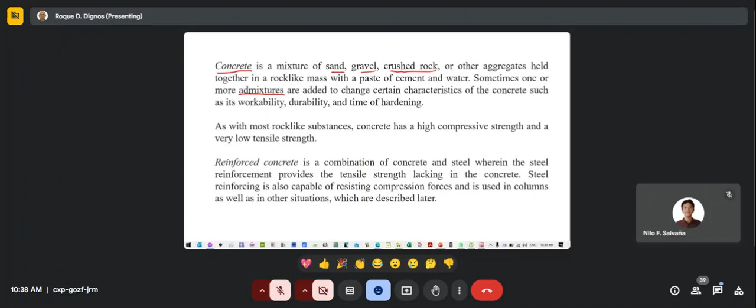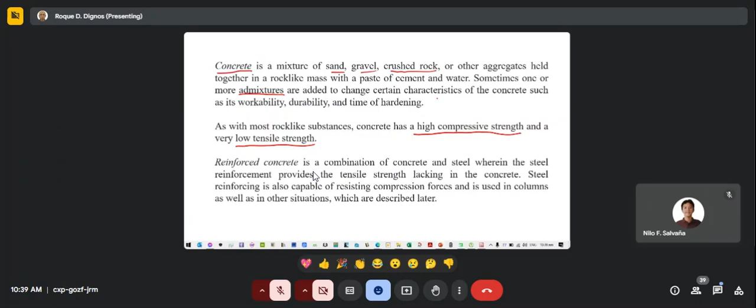Concrete has a high compressive strength and a very poor tensile strength. So if you want to use concrete as a structural material, it's not effective because concrete is high in compressive. We have to be reminded that our structural engineering is nothing but the moment, the shear, and the axial. Compression, okay. For shear, if you subject concrete to shear, it will crack, and concrete cannot resist the crack because it's very low in tensile strength.

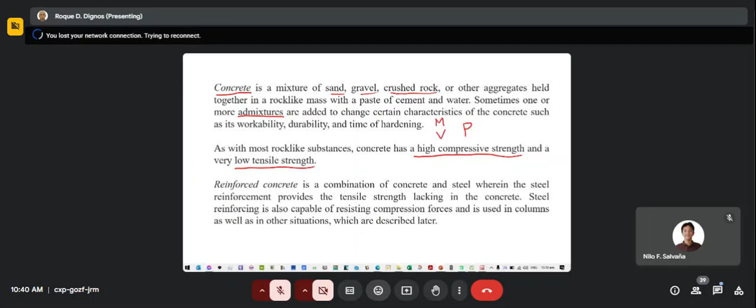And with the axial force, if the force is compression, no problem. But not all axial forces are compression. That is not usable. All the tensile forces or tensile stress will be carried by the steel, which is high in tension, and concrete is very high in compression. So therefore, it's doable. Reinforced concrete.

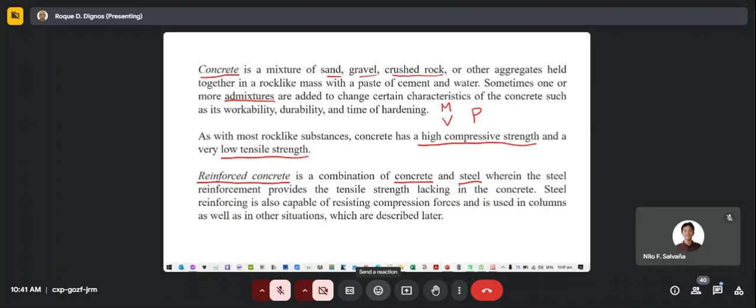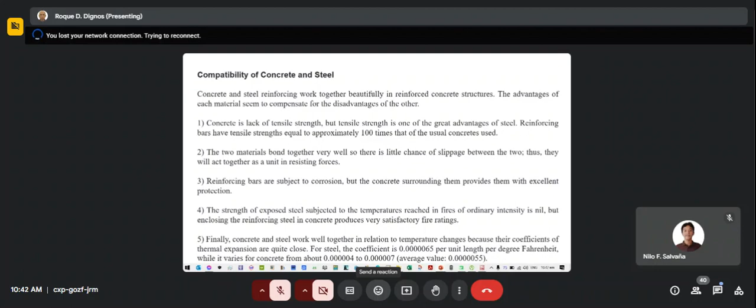Now, let's talk about compatibility of concrete and steel, and why reinforced concrete is the number one material in our structures today. Everywhere you go, there is always reinforced concrete. Big structures. But if you go to the substructure, it is almost always reinforced concrete, like your footings, your piles, anything in the substructure. One compensates for the disadvantage of the other. Tension is a disadvantage of concrete, but it is an advantage of steel. So they compensate each other.

No? So partners should complement each other's advantages and disadvantages. That's a joke, class. That's only in RC, in real life, not anymore. It's not true. It could be true, but not every time.

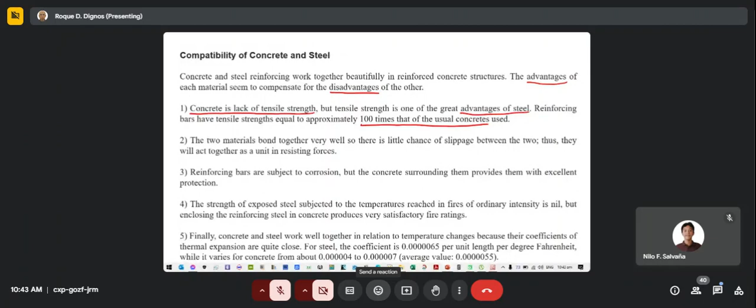100 times that of concrete. That's a big difference, right? The tensile strength of concrete, I think it's fr, the modulus of rupture, and steel is 100 times that if you want to get the tensile strength of steel. So they bond together very well. There is little chance of slippage between the two. Thus, they will act together as a unit.

So if you see reinforcement, maybe in your house when you construct something, you see that it has corrugations. It's not a plain bar. Because of the corrugations, when the concrete is poured, it bonds even more. So it will eliminate slippage because of the corrugated steel bars.

Number three, reinforcing bars are subject to corrosion. This is the disadvantage of steel. Steel is always subject to corrosion. But because your bar is embedded in concrete, the steel is protected from salt, especially near the sea where the air is salty and it corrodes easily from the wind. So reinforced concrete is a protection. That's why most of our port structures, the structural columns, piles, port slabs and pavement, are all concrete.

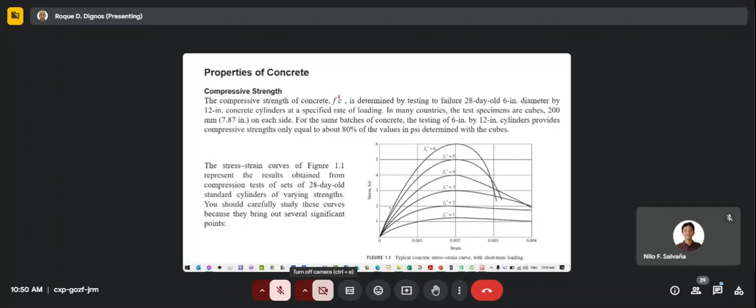We know there's a prime, f prime c, from our materials testing. We are in the Philippines and we use the American code. But have you noticed we are using SI, the International System of units? That's why it's very difficult for us instructors. That is very difficult. And the formulas are not the same.

So, you're familiar with the cylinder, but on the other side of the world, they use a cube. So if you go to the other side, the European, even in the Middle East, and all countries invaded by the British, like Malaysia, Singapore, I think Macau, those countries also use the cube. So it is a 200 mm cube. So again, it's a unit.

British and Europeans use the System International, SI, while Americans use the English system. It's difficult, right?

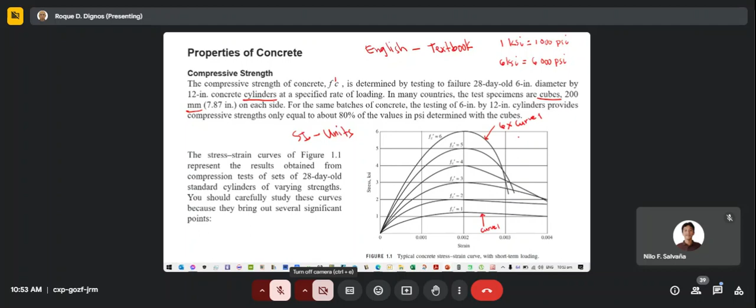Or the compressive strength f'c of 1 ksi, they all reach the peak at a strain of 0.002. So if you can see the diagram, more or less the peak is there. Not perfectly, but almost the same. And the rupture at 0.003.

What do you mean by that? Another term is crushing. They will crush at 0.003, more or less. Of course, it's not perfectly the same, but more or less they all fall there. So that's why don't be surprised in our subject when we go to the stress-strain diagram, our strain epsilon of the concrete at ultimate or crushing is fixed to 0.003. Every time, in all computations, the value of our strain of concrete is 0.003. There's a meaning to that, and this curve is the explanation.

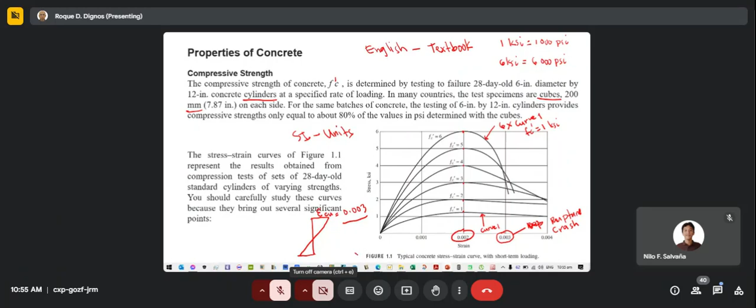And then the static modulus of elasticity, that is not Es, it's Ec, the modulus of elasticity of concrete. Es is for the steel, and we use this formula: 4700 square root of f'c. So that is for the static; in our subject it's more on the static modulus of elasticity. So we'll be using 4700 for our computation, unless the problem gives you a formula other than this 4700 square root of f'c.

And then we also have the dynamic modulus of elasticity. Generally, it is in the range of 20 to 40%, 0.2 to 0.4 of Ec, the static, more or less. And this is used if we are modeling or designing the structure considering seismic forces or earthquake forces.

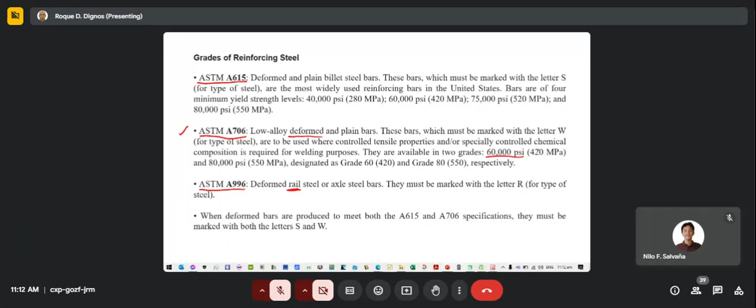And usually we use A706 and A996. So you have a train, a rail truck. And this is usually what we are using in reinforced concrete. And usually we use 60,000 psi, and the manufacturer puts 420 megapascal, even though the equivalent of 60,000 psi is 414 megapascal. Because in the test, they don't provide only 60,000 psi, they provide more, para safe.

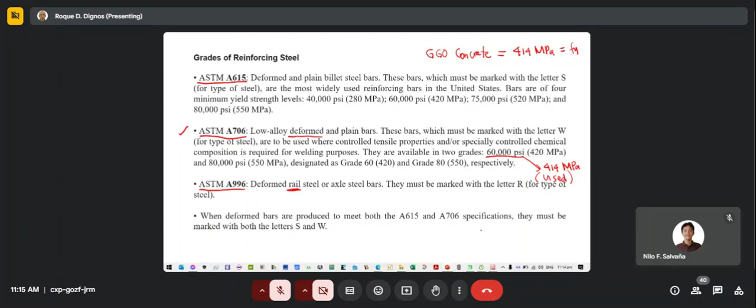So you have these identifying marks on the site. You must know how to read reinforcement delivered on the site. So H there is the symbol, and the 11. So this is English. In English units, they don't say 12 mm, 20 mm. No, they say number 11. That's why I told you it's not easy to teach this subject, because you need extra effort. Then if it so happens that what's on your site came from a manufacturer that uses the English standard of units, you must know that. Anyway, later on we have a table for this.

And then the number 11 is 36 mm. Okay, S stands for the type of steel. So if it's A706, it should be W. And 60 here stands for 60 ksi. That is the grade. So again, if I say grade 60, that is 60 ksi. And the equivalent of that is 414 megapascal. So the same for different size types.

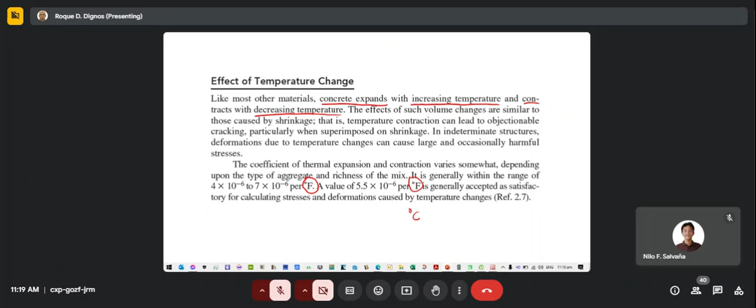And then one of the most important things that affects the strength of concrete is the water cement ratio. So kini siya suki gini yung water cement ratio, gawas ni sa board exam. When I took my license exam in Qatar, there was water cement ratio. So, water cement ratio. And water cement ratio affects also your hydration. So if your water cement ratio is less than required, dili mag-paste, dili mag-bond properly.

So usually the water cement ratio standard is 0.5. Normal concrete ranges 0.4 to 0.6. Other countries, they fix it to 0.5. Mahirap yan eh, 0.4 to 0.6. It's very hard to quantify, you know.

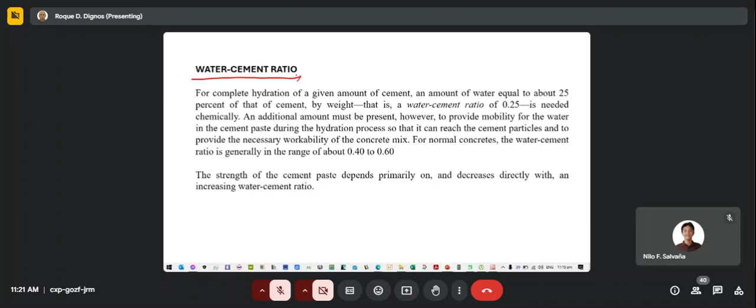Okay, so that ends our discussion. I will save this one. Okay. So don't worry, everything we discuss will be posted in our Google, and then I thought maybe we can have a little bit of, we still have 30 minutes. So anyway, as we progress, makita na to, okay na tong progress. So dili nga ni permi. Napa man tayo 30 minutes. Do you have any question?

Say yes or no. Para mabawa na ko nga napa mo diya. Kaya mag-istorya class, naka-picture eh. Na question, yes or no? None, sir. Thank you. At least, buhay pa mo ha. Okay, so proceed ta. Yung kamot ta ni class, mamugas ta kayo. Kamo, narasad mo sa balay siguro, ha? Ano problema? Di kaya class, alaw na pa'y section S. And then 3 to 5 section. So, tulo mo ka. Okay.

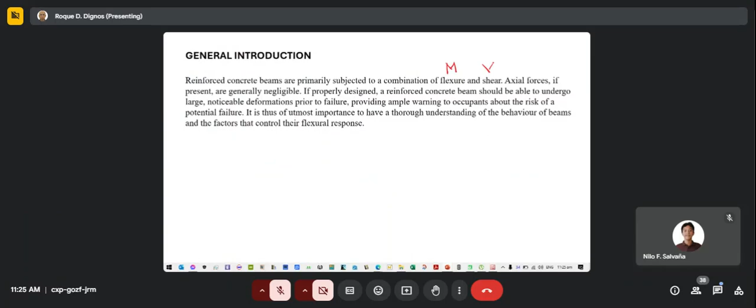Proceeding. Proceed ta. So, start with topic number 2, singly reinforced concrete. Ay, nako na. Dili. Luma nga PowerPoint. So, okay, so we start with the, sorry, singly reinforced beam. So we know reinforced concrete beams are primarily subjected to flexure and shear. So we already discussed that. Subject to moment, to shear, and to axial force.

So, man lisod ang structural engineering class, tuluro mo na. We are just dealing with the three forces of nature: moment, shear, axial. And usually for beam, axial force is negligible. Okay? Kay if axial force is not negligible, so di na beam, column na na.

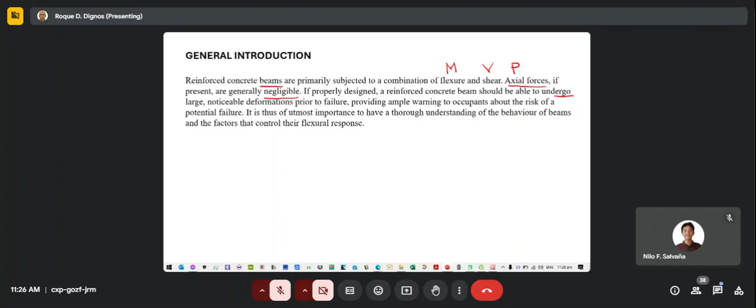So, a properly designed reinforced concrete beam should be able to undergo large noticeable deformations prior to failure. So this is the heart of the ACI code, that the reinforced beam will be able to undergo large and noticeable deformation. So ACI code now is very serious with this, in such a way that crushing failure is not an option. You will understand what I said later on as we go on with our computation. As of now, just swallow what I say, and you can digest it later on.

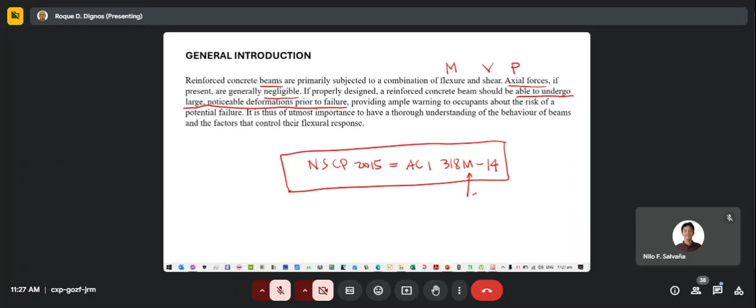So why ACI code? Of course, we are using ACI code in the NSCP. Our code in the Philippines is just a copy from ACI 318M-14. So this is the equivalent, the version 14 of ACI and the SI version. We call it metric, but still the same, still SI. Because they don't like the idea that they are forced by the Europeans to provide another document of ACI that is also SI unit, because they are contented with English. So English is without M.

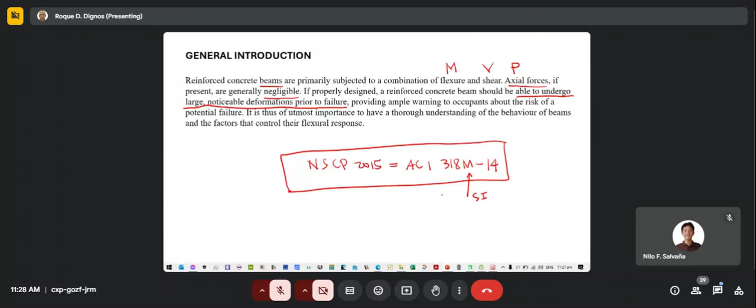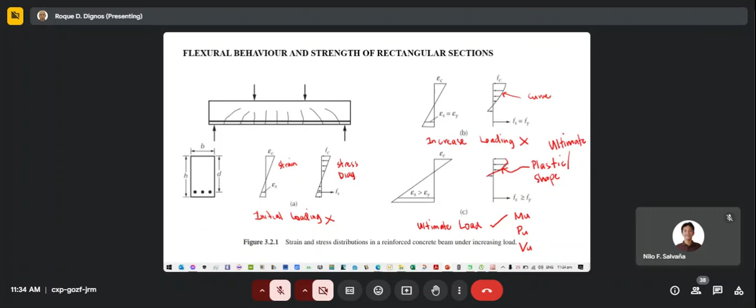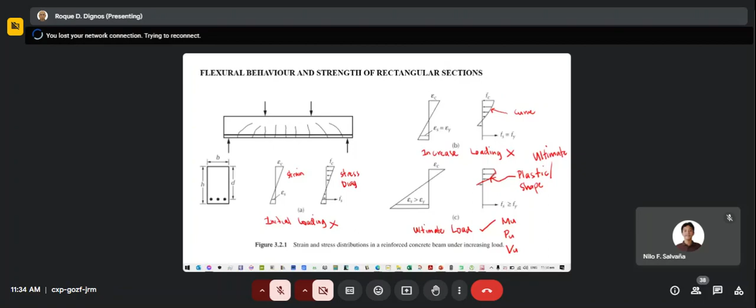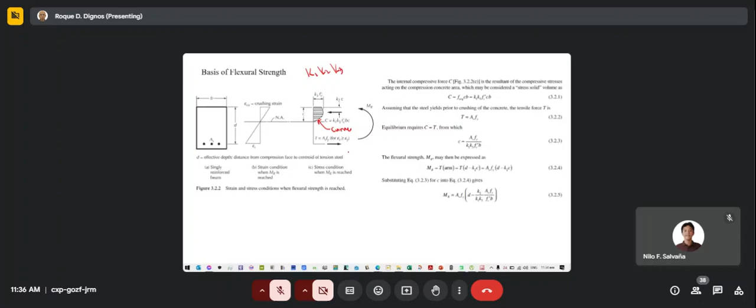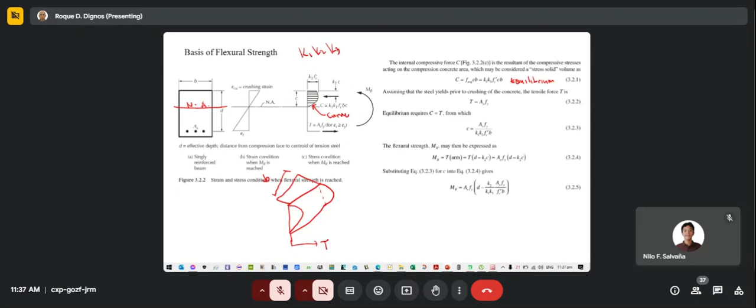So now, Dr. Whitney proposes in his dissertation the Whitney rectangular stress block. Instead of this, because it is hard to solve, this is called the Whitney rectangular stress block, in such a way that the curved stress diagram will be converted into a rectangular stress diagram. So the depth of the rectangular stress block will be represented by the variable A.

And because we need also the neutral axis condition, the relationship between A and C is with the product beta 1. So A now is equal to beta 1 times C. Beta 1 is solved with the ACI provision. And then the f'c average is converted into 85%.

So Whitney successfully demonstrated that conversion from curve to rectangle, from the test, that indeed 0.85 is not just acceptable, but it is really the real thing. So that's why ever since Whitney introduced this method, until now, for how many decades, we are still using this one. Even the Europeans use the Whitney rectangular stress block, but with a slightly different value.

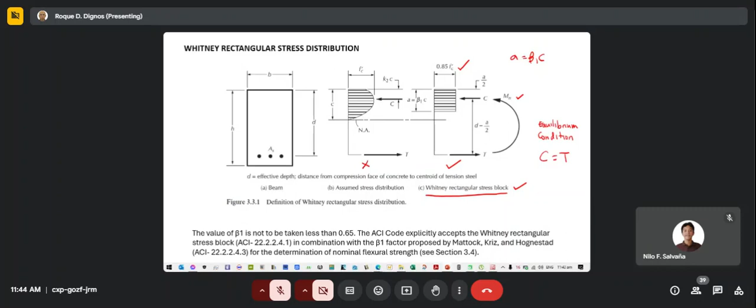So nominal, having tension reinforcement only. Take note, only tension reinforcement. So if the beam has only tension reinforcement, that means it is a singly reinforced beam.

Okay. So for computation of nominal flexural strength, according to ACI code, ACI 22.2, ACI said the strength of members shall be based on satisfying applicable conditions of equilibrium and compatibility of strains. So this is not hard to remember. There are only two conditions in our reinforced concrete computation: the equilibrium condition should be satisfied, and then the compatibility condition.

Compatibility. That's it. Balik-balik na. No matter what is the form of the equation, it will always go back to that. By equilibrium and compatibility, you can derive any kind of formula, and this is always the source of derivation. So that's why in reinforced concrete we don't memorize formulas.

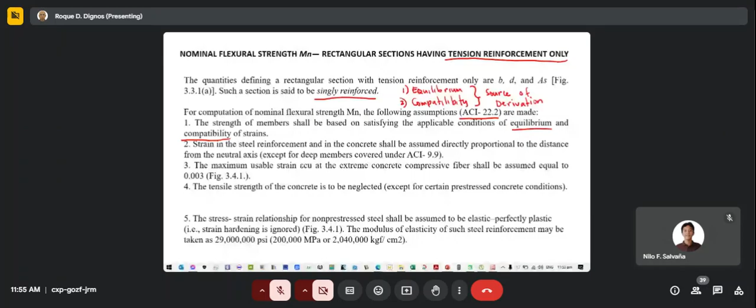So at fy, it will still reach the peak. That means after the peak it will go down, right? So the curve, when it peaks, the next point will be going down. So that's an assumption. At a strain of 0.002, the concrete is still elastic until it reaches the rupture point at 0.003, the rupture point or the crushing, because the concrete at that point will crush. So the concrete is destroyed. That's what is meant by elastic, perfectly plastic relationship.

While for the plastic part, if you can see the curve, the steel now reaches a perfectly plastic state. So this is plastic. So what do you mean when steel reaches the yield strength? The strain of the reinforcing steel will still increase, even reaching 0.009, while the stress is fixed at Fy. That's why in our calculation, even though the strain of steel sometimes reaches 0.005, our Fy is fixed at 414 for grade 60 SI, but usually this is the one we are using. That is what is meant by perfectly plastic.

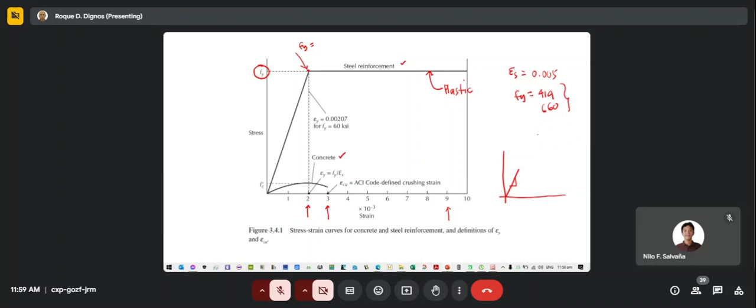So in concrete, we don't model the realistic curve behavior of steel. We model the steel as perfectly plastic. That's why we eliminate that part. So we just make it perfectly flat at the yield strength. That's the assumption in reinforced concrete. If you don't, it gets very complicated because you still have to consider the strain hardening. Okay.

So now, before the computation, at least we know why it is like this. Sometimes it's very hard to tell a child, do this, do that. So first I try to tell you why, and later on I will teach you how. So that is the computation part. So this block to the neutral axis C. Then we have the formula for beta 1.

By the way, be careful. If I were you, make sure you have ACI 318M. The first printing of the NSCP is downloadable. For the second printing, go to Shopee, because you cannot download the second printing. Okay, so be careful with the first printing.